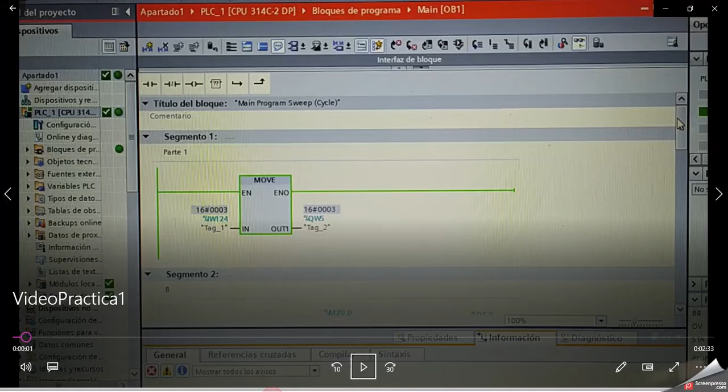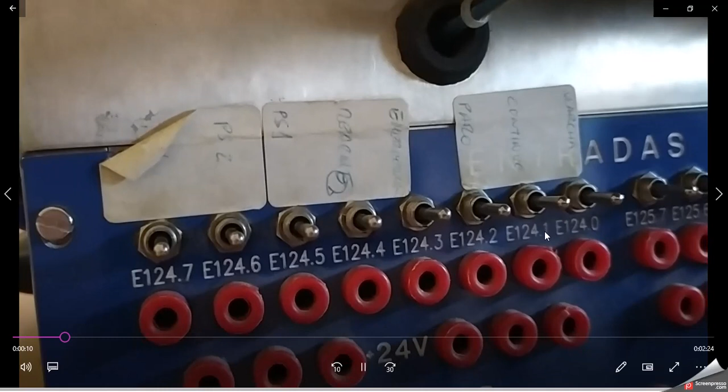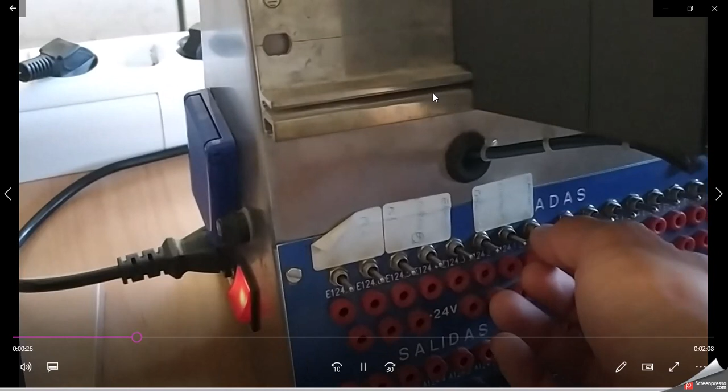Well, in the video, it's working, and when I press E, well, this is just to show what is in one side and in the other, and as I'm clicking the button from the S7 300 direction 124, here you can see that this is the peripheral ET200S, so it changed. This is part 1. Part 2.

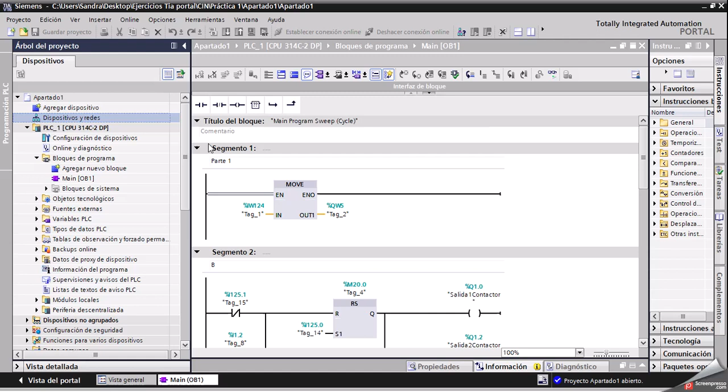Using the boards with the DS1X modules, the Profibus address 3, it depends on the station. We needed to recalculate all the addresses, and everything is okay now in the program. So I can just click here in dispositivos y redes, so networks and devices, and here I can find the Profibus addresses of all the devices according to yesterday's setup.

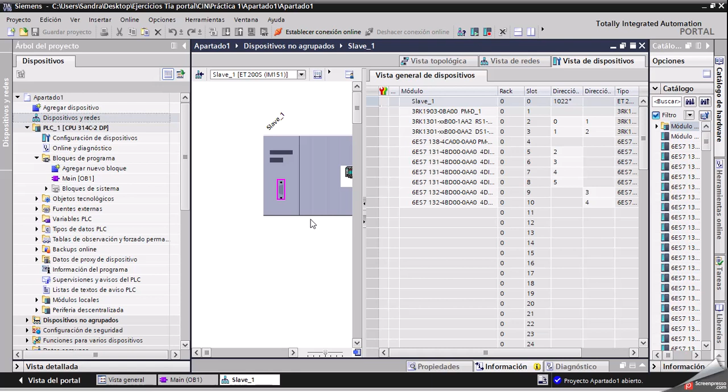So the master doesn't need any direction, but the slaves, if I click on the slaves, it takes some time. Here when I click on the slave general, here direction was 4 for slave 1. If I go to slave 2, for the same information, it was direction 16.

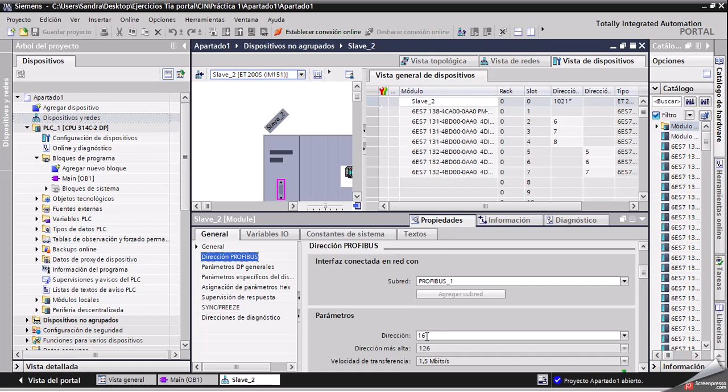Well, to carry on with the explanation, what I need to do is to make a direct start of a motor with a start and stop. When activating the stop button or activating the limit switch, that is the thermal protection, if it's not ready, the start button is not going to start anything. So here it is in main.

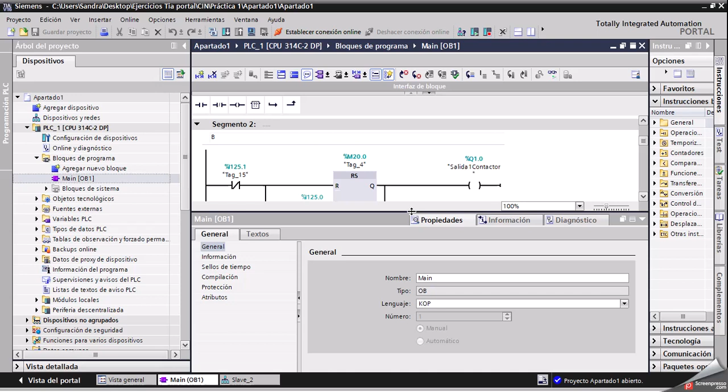If I scroll down here, this is an RS set by direction 125.0, and it stops when 125.1. Well, in this case, this is a contact that needs to be ready. So it needs to be on in order to allow this block not to stop the motor, the electrical motor.

So in this case, this is like a closed button, and this one is open. So it needs to be the opposite. The logical way of dealing with these inputs is different. In this case, when the thermal protection is okay, then with an open contact, it's fine. Doesn't have any signal. In this case, it's the other way around.

When it's okay, some signal should be passing here, but as it's open here, the signal stays here until you unpress, or in this case it is a two position switch. You need to open the switch in order to allow current to go through. Well, so then if I press this one, contactor 1 and contactor 2 start. It's just a signal, it doesn't need to hold the signal.

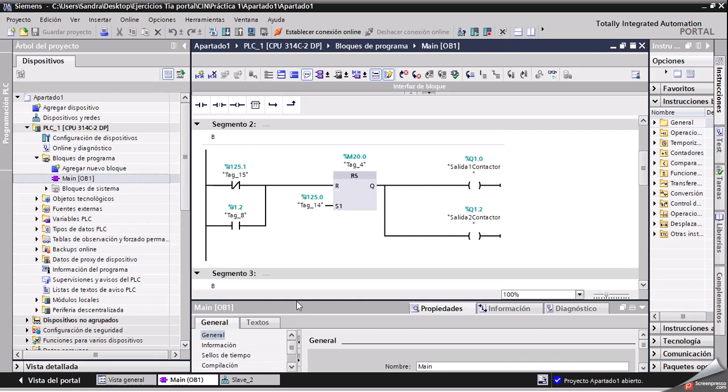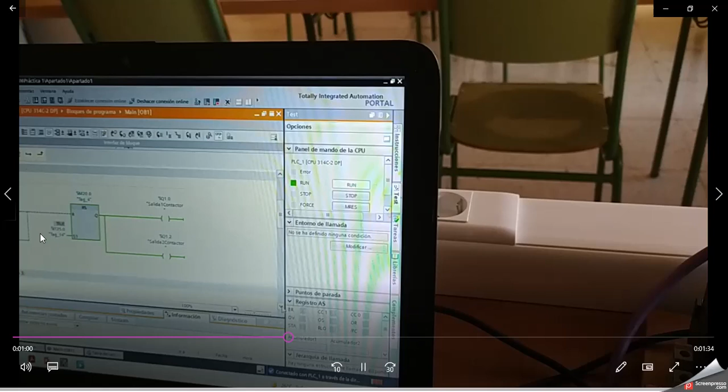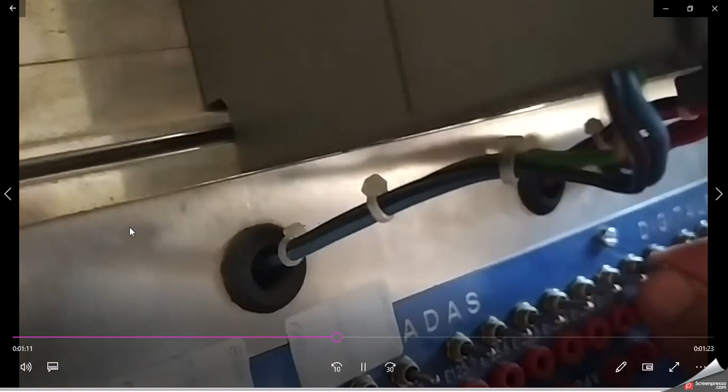And in that case, if you unpress this one, or the thermal protection goes off, then the motor stops. And well, here in the video program, you can see that if this one is true, but in this case the second one is more important, because when you have both signals, maybe this should be the other way around. I should have used SR instead of RS.

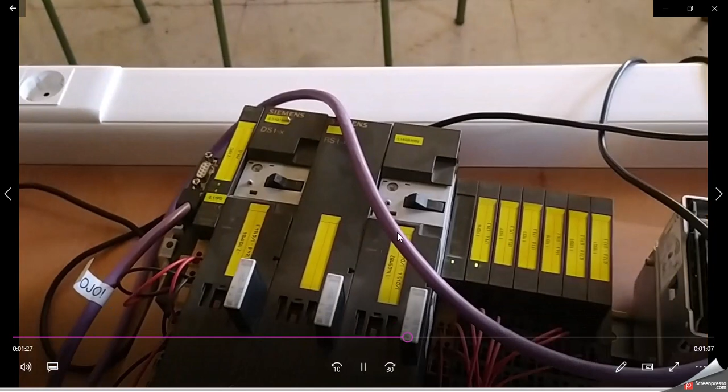Here now I am not pressing S1, so with some signal from these two, the motor should stop. And here we are going to see how the contactor works, here you have one of the contactors that is now working and the other one.

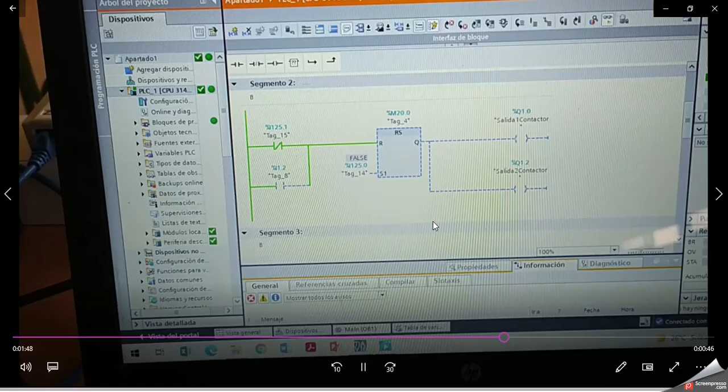And this is the third part of the program. Let's go back here. Third part, yeah, the tripping signal and stop here. Stop button stops the contactor and the relay tripping signal as well. And this is what happened, what you saw in the video.

And now, last but not least, the fourth part of the video was just with an LED light. We need to show that the engine is working, and after 5 seconds it changes the rotation of the motor. So we need a light that shows that the motor is turning right, another one that it is turning left, and another one that the engine must

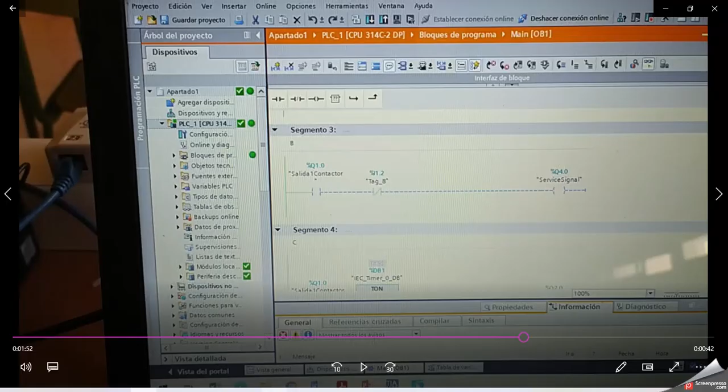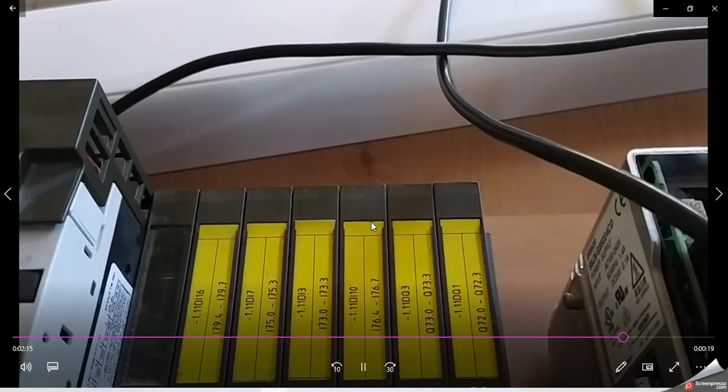and another LED is on when the motor is rotating either right or left. And for the part that shows that everything is okay for the motor to rotate. This is the timer that is set in 5 seconds, and this light shows that the motor is turning right or turning left. And then here we are going to see,

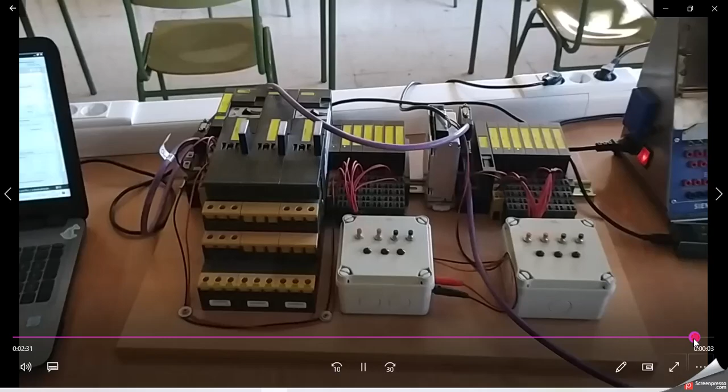let me see here. Yep. Wait a second. The motor is ready and it's rotating, and this one is rotating right or left, and then it's rotating the other way around. And that's all for the first part of the practical session.